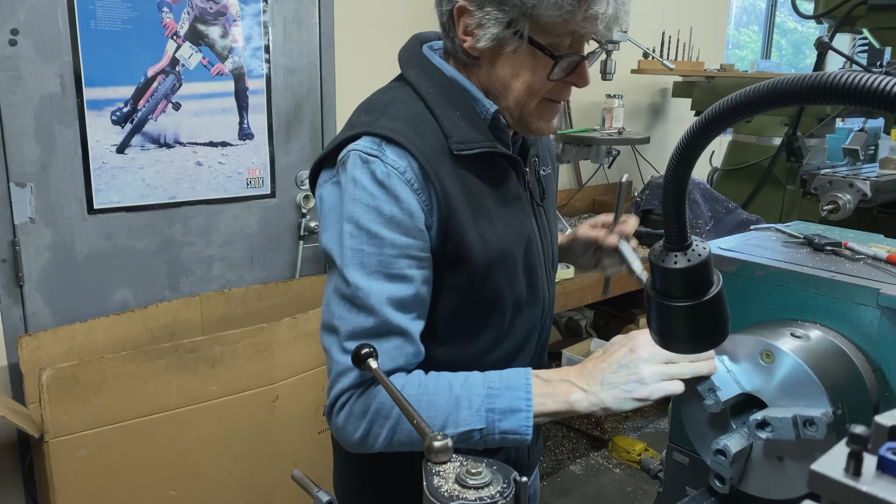That's what happens when you're in the shop. Things sometimes go a little sideways and you don't expect it.

Hi, I'm Paul Brodie. Mitch is behind the cameras. We're back in the shop working on a Giraffe Bike, an 1894 Giraffe Bike.

I have metal, I bought some metal. I had to order it, they don't have this just lying around anymore. This is bronze, 660 bronze, 2 1/4 by 5. It's a little bit longer, but I got something I can grab in the 3-jaw chuck. This little piece of metal has some weight to it. $150 including tax, so it's like, whoa, okay, well, I need it. I don't want to use anything else.

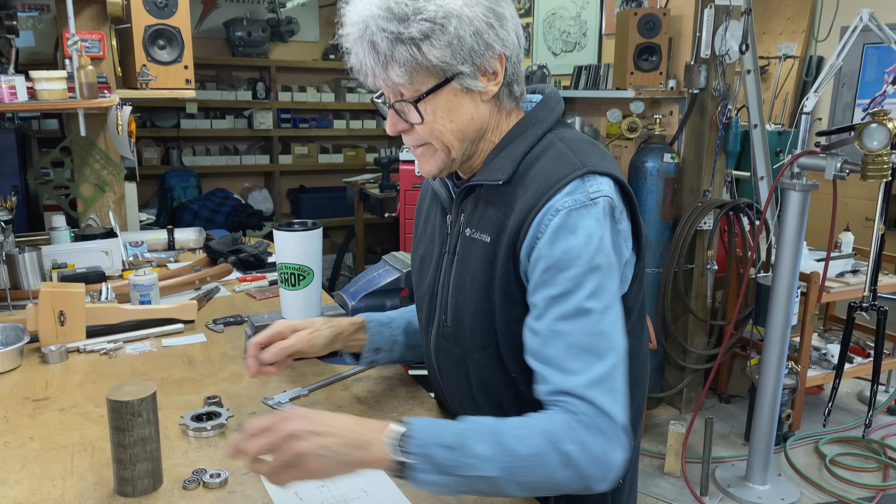I bought some bearings, these little bearings, there's 3 of them. They're made in Japan, these were $60. So the cost is there, that's for sure. I'm not complaining, we have to do this. This is a good project.

I got the freewheel, you saw that, that was another video that's done. And I bought a tool because when I designed the hub, I had to figure out that this tool has to go in like that. There you go, it fits in there. So the hub can only go so far.

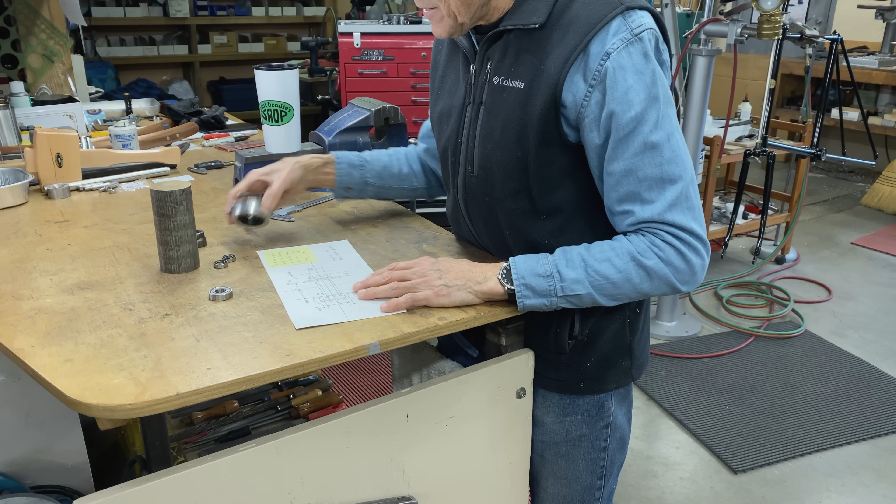Now, another point that's going to happen, when you look at the drawing here, here's the bearings. There's a bearing here on the left side, and because the right side has not a lot of space, since this is kind of small, I had to use 2 bearings. That's where those bearings go.

This here is the thread, that's where the freewheel threads onto, and you can see I made a note here. I was wondering a little while ago if we need a spacer because I can't thread right up to the shoulder. There's always a little gap because the tool has to stop, and the tool has a point, and the shoulder of the tool has to stop before the shoulder of the hub. So I need to make a spacer to go in there so that when I screw on the freewheel, it doesn't lock onto the end of the thread instead of against the shoulder. That's not a good design. So I took that into consideration.

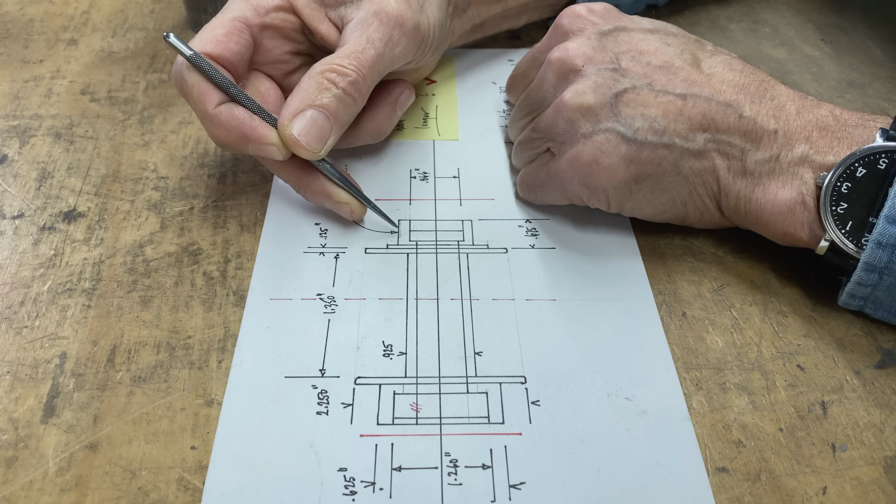Another thing I want to show you is, am I starting on this side here, or do I start on this side here? Because I do have a choice. Well, I'm going to start on this side here because there's a big shoulder. See there? There's a big shoulder. And here, there's going to be a thread. If I hold this in a 3-jaw chuck, even if I have some aluminum spacers in there, it can damage the thread. So I do this end first.

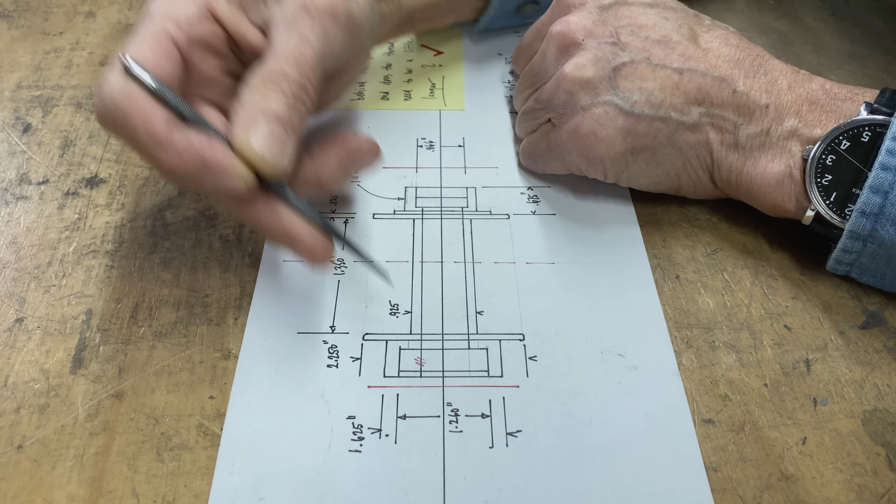I bore it, I drill the hole, I bore out the middle part. And then when I've got all this shape done, basically this is just rough still, that's when I flip it around. I cut off this part because there's going to be a piece here, you can see what's going to happen. I've got about 1 inch extra, I didn't have to order quite this much, but whatever. And that's the frame, that's where the frame goes from here to here. So I'm obviously going to have to make some sort of spacers to go in here to space the hub from the frame.

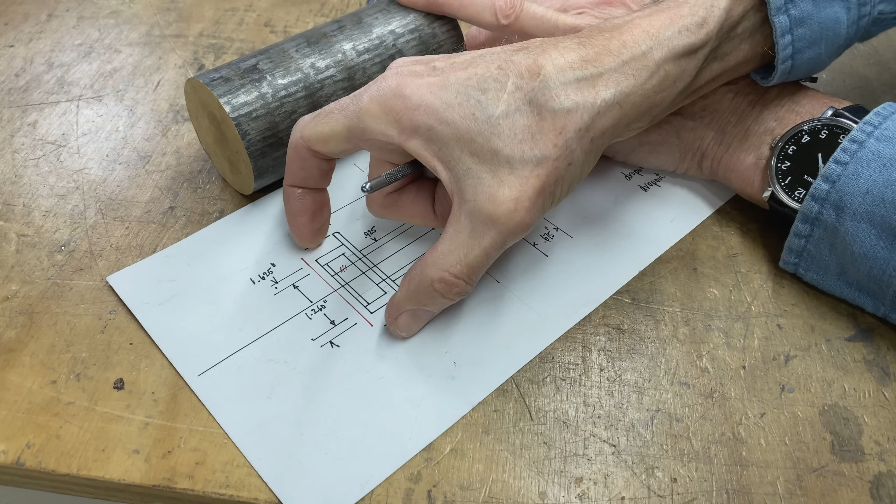I'll cut it off, I'll hold this here in the 3-jaw, I'll dial it up, and then I'll machine the thread and the spacers for the bearings. Let's go to the lathe. I'm excited, thanks for joining us.

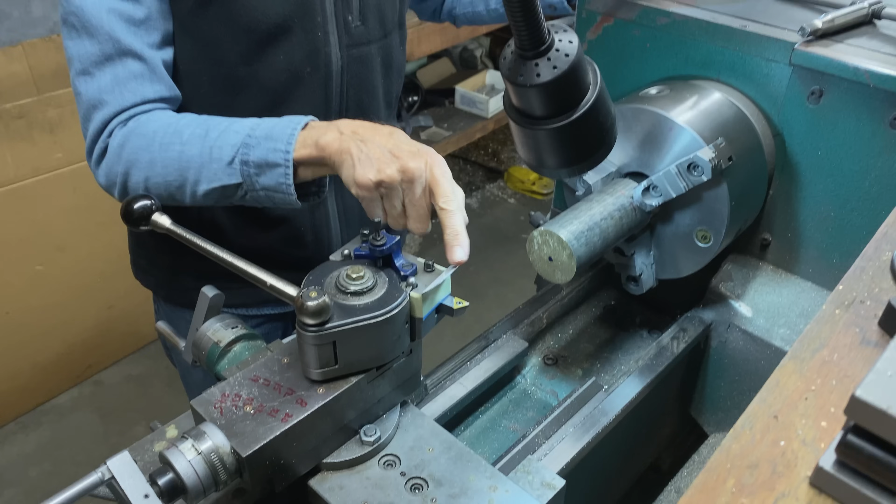I made a little shield here out of aluminum, it's pretty thin, it's 040, as in 40 thou. We're going to see if I can kind of hide behind the shield, because last time I was really getting pelted by all this stuff. I had to wear a full face shield. You couldn't see that in the video, but I got the full face shield because these little chips, they're hot and they're sharp, and they were coming all around my glasses. That part of it wasn't a lot of fun.

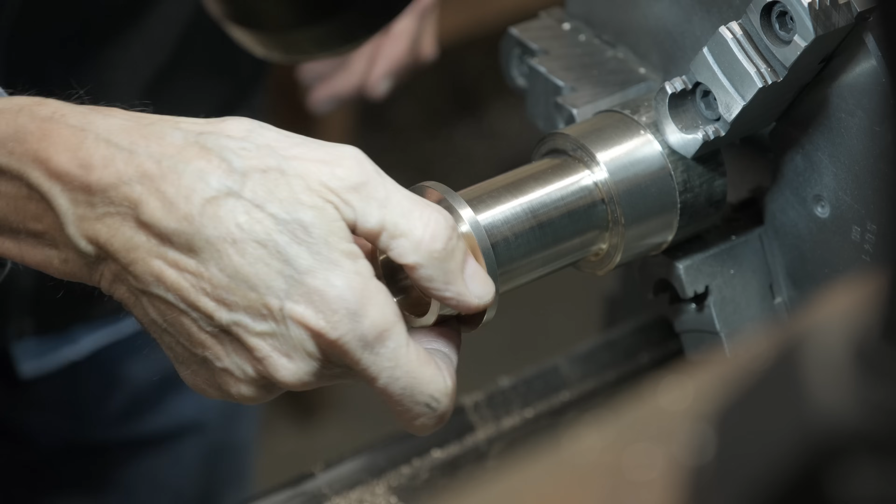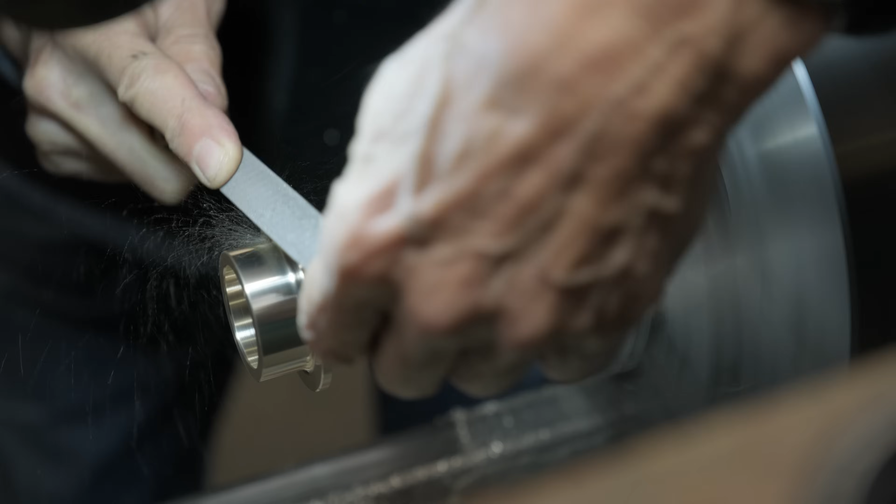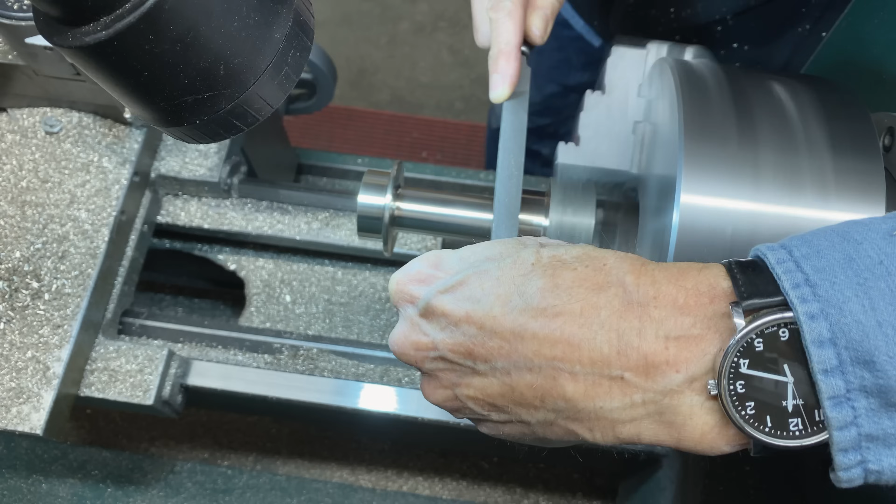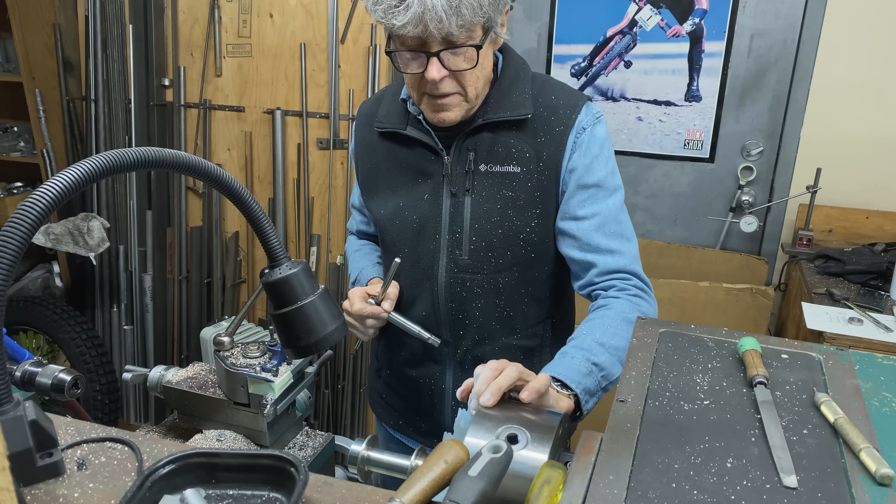Okay, we're going to work on this part now. I think we'll hacksaw it next, use the bandsaw, and then I got to drill the holes for the spokes. It'll be easier right now while I don't have the thread on this end. So I think I'm going to hold it in the rotary table, in the chuck, and next are the spoke holes. That would be good.

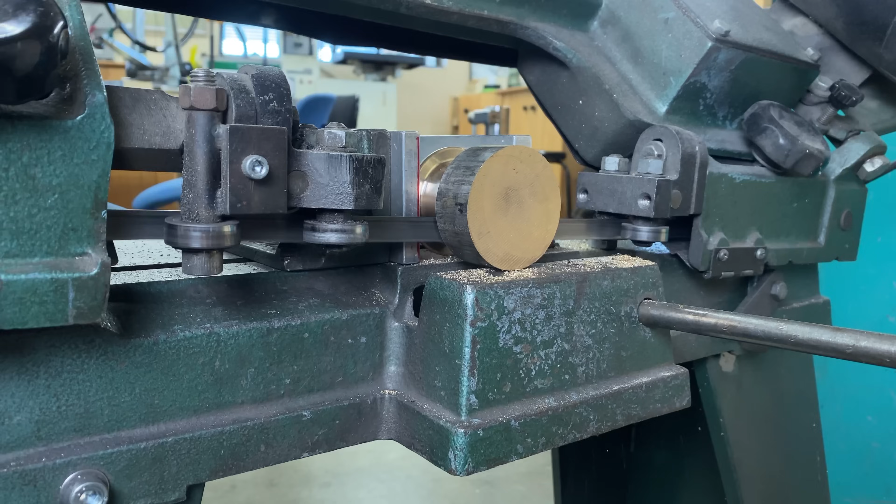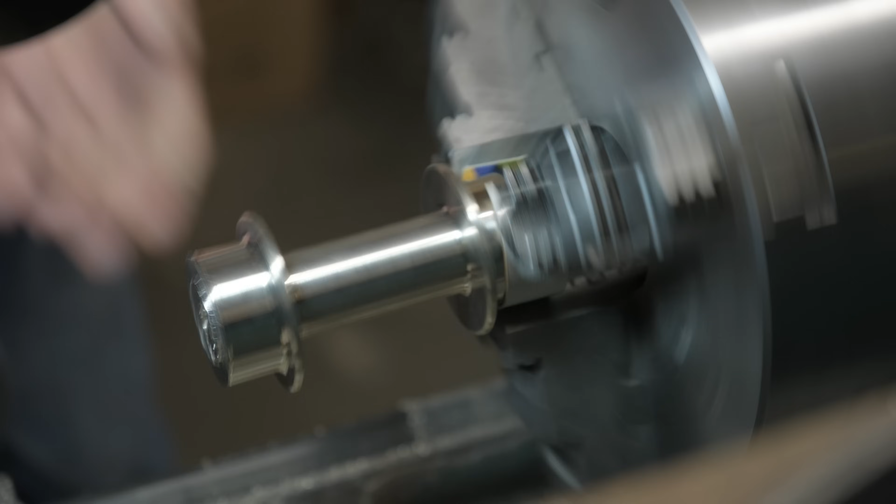Oh! That's not supposed to happen. Oh, it chipped it. I can fix it, I just have to take off a little bit of extra material. Okay, that's my blooper for today. You've seen it now. That's too bad.

I thought I was doing everything right, but I guess it's out so far, and I took a little bigger cut because I thought I could. Well, I can't, not with the cardboard in there, because the cardboard is kind of slippery, right? See here, it's got the paint on the cardboard. Okay, smaller cuts.

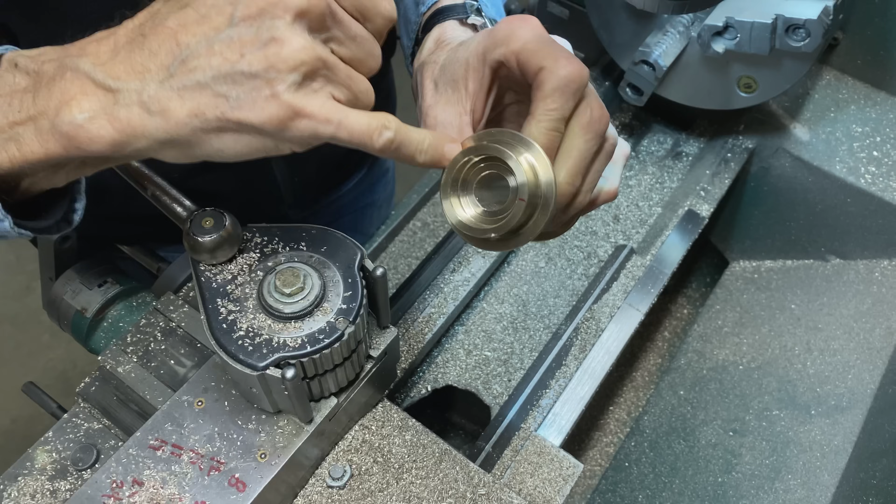See these marks? That was my screw up. I need to fix these marks, so I'll put it back in the chuck and take off the least amount possible just to clean it up. So I don't feel good about that, but that's what happens when you're in the shop. Things sometimes go a little sideways and you don't expect it.

There's one tiny little mark there. I'm just going to leave that because it's so small, most people will never even know it's there. So there we go, I fixed my mistake. Now we're going to go to the mill next, use the rotary table, put spoke holes in, and then after that we're going to put a thread on there, and the hub will be basically done.

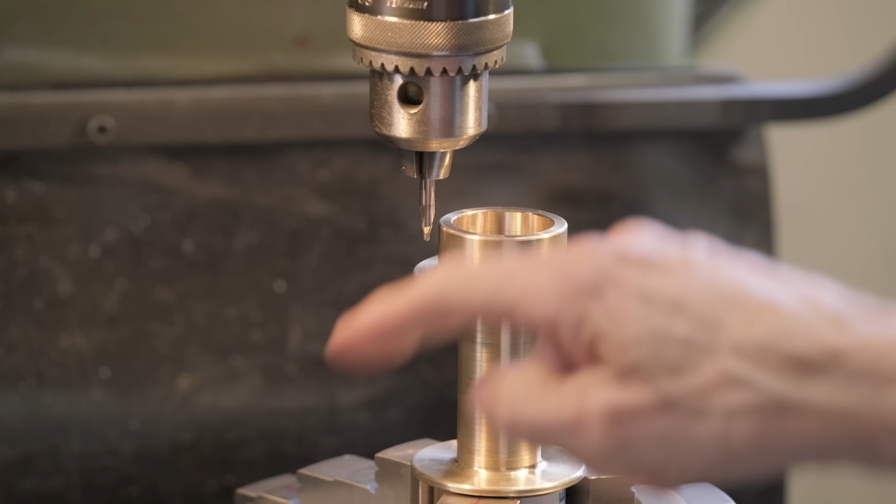I got the rotary table all set up here. I've got a little center drill there, and I've got my notes from the front hub. This tells me how much I have to move to get 16 holes, because it's a 32 hole hub.

That's important. What I'm going to do this time - last time I just used the center drill on the front hub, then took it over to the drill press because I thought it would be easier, since I've got a very small drill, like an 085, a number drill. I'm going to go around again and drill the hole because what happened in the drill press is that it grabbed and wanted to pull the hub up. It was kind of hard to control because it's bronze, and it's not always easy for machining - it wants to grab sometimes if you're not set up properly. So I'm going to use the center drill and then we'll go around once again with the smaller drill.

Spoke hole size. Okay, 22.5 degrees. Here we go.

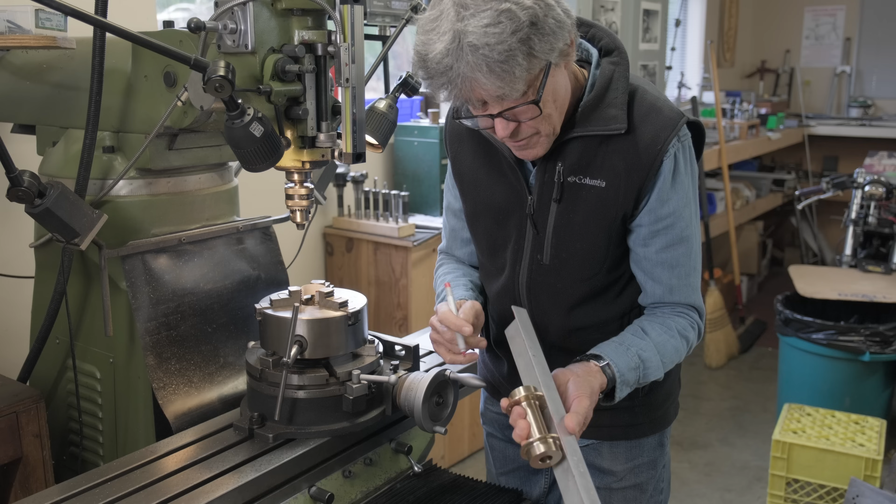So what I'm going to do here, I'm going to mark right in the middle in between the holes with my red Sharpie, and then use the extrusion because that'll line up perfectly. Can you see how that works? Then I put it right there. So I'm halfway in between the holes because the holes have to be offset - if they're not offset, that's a problem. It's hard to lace the wheel when the hub's incorrect.

So one more go around here with the holes, and then we'll go into the drill press. We'll deburr - we got a special drill. Is that pretty close? Well, might be a couple thou out, but not bad. So, 790.

Oh, oh. Might have to use silver solder - I went too far. Okay, oh well. I should set a stop, I should set the stop. So what I should have done here, see here, that's the stop. I need to put that up to there, and then I can't do that again.

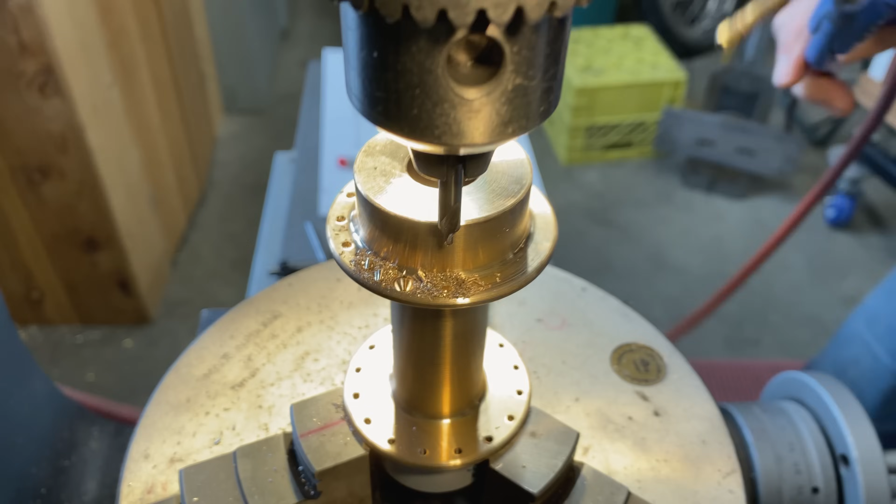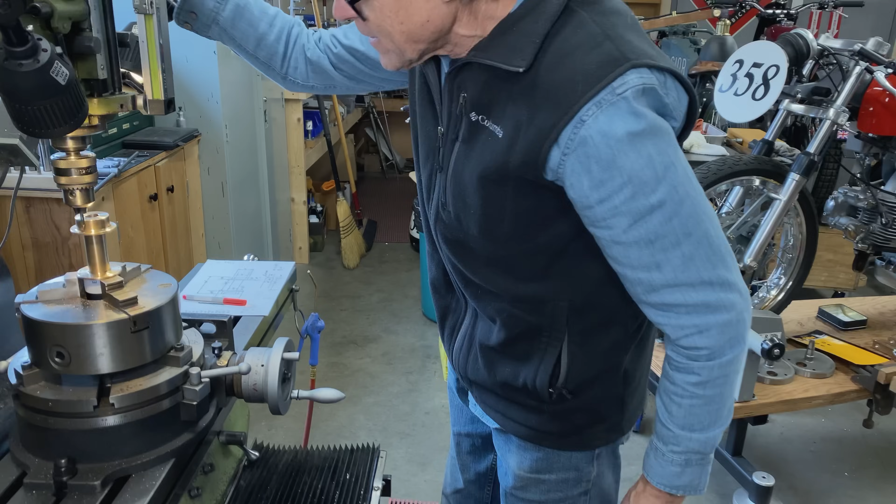I'm talking about other ways to make mistakes. Oh boy, see there? The center drill went too far. So that needs to be filled in with silver solder now and re-drilled. So that I can't screw up anymore now because I've set the stop.

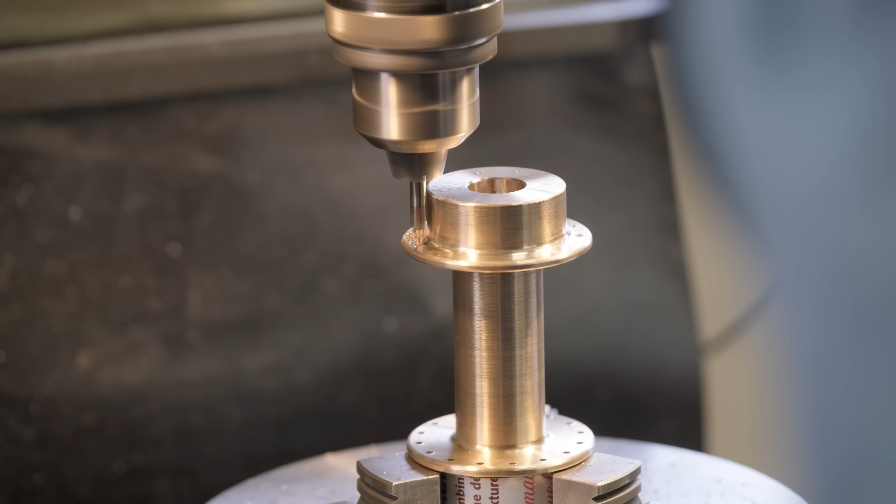When you silver solder, always use some emery cloth and sand the oxide off. It really helps it to flow. That's a good tip.

I did not think we were going to be using the torch today. This was a machining day exclusively, and now because of what I did, we have to get the torch out. Never done that before. That's a brand new mistake. So it just shows that you don't know, you know.

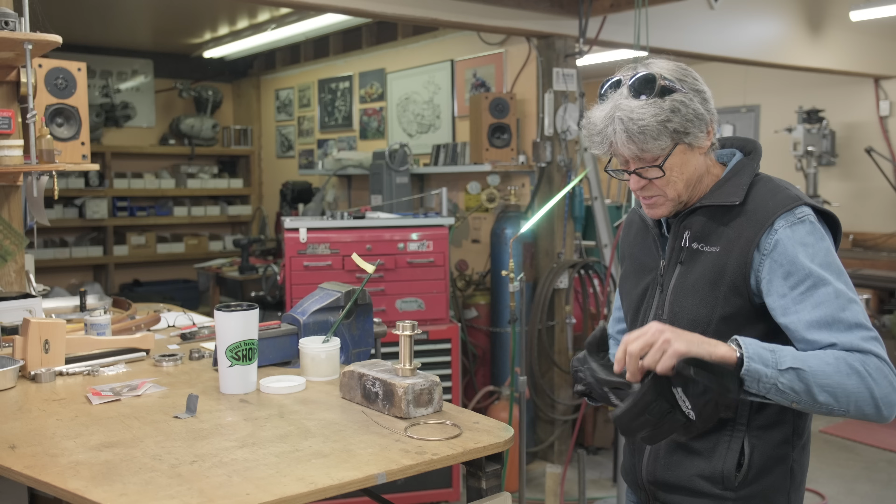Actually, what happened was Mitch and I were talking. I got distracted. It's not his fault, but I needed focus and I lost my focus. And it happens really quick, like an extra second pulling down, you go too far. It breaks through on the bronze, and then it goes fast. And then it's a big oops.

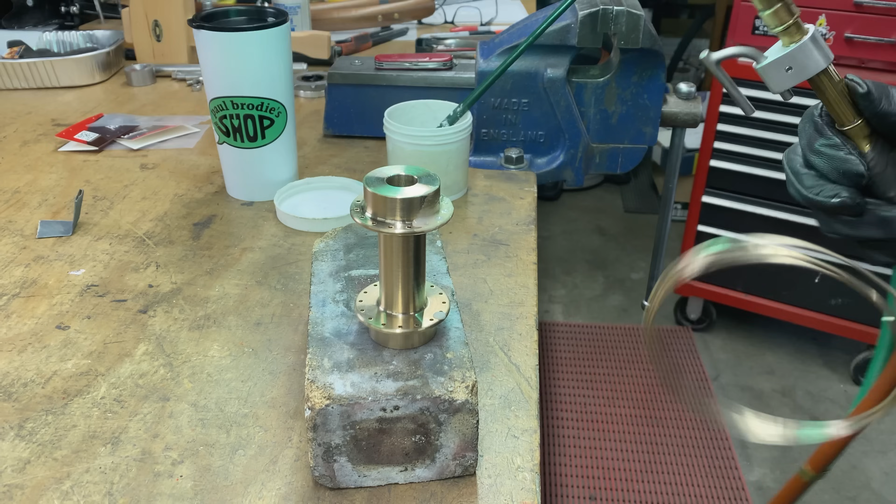So, okay, I got my flux here. A lot of yapping, I know, but hopefully I can salvage this. So I got to get it up to heat, but not too much. Maybe I'll put the flame down just a little bit. This is a huge heat sink, so even though I'm heating up the flange, not quite sure if I got the flame hot enough, but we're going to find out.

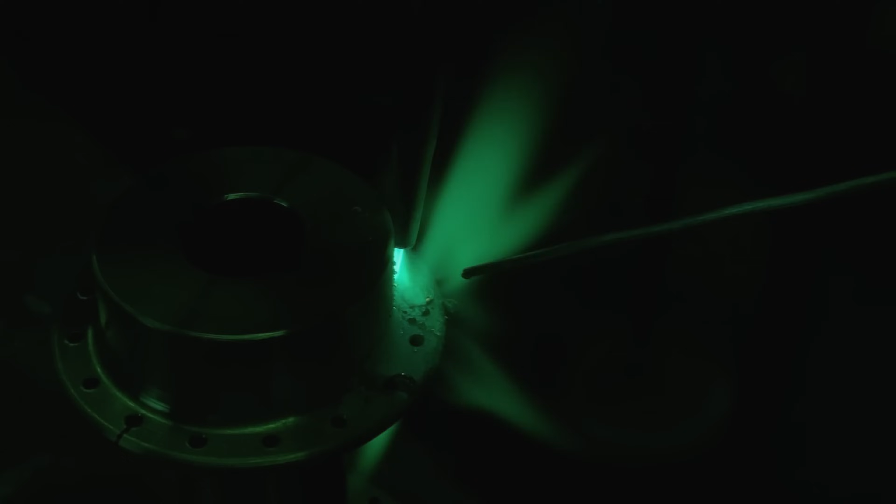Sometimes if you put the cone right down inside, that's a trick I learned from brazing.

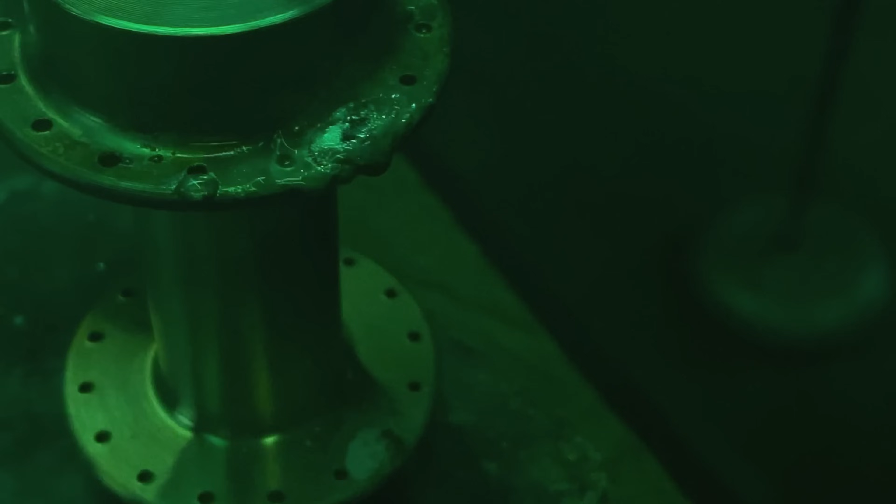There we go. Okay. You see that? It flowed. Whew. What a nail biter.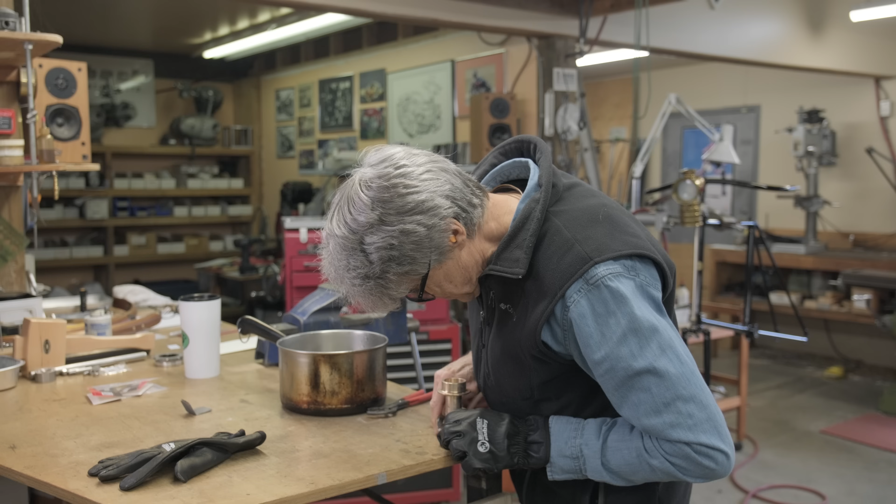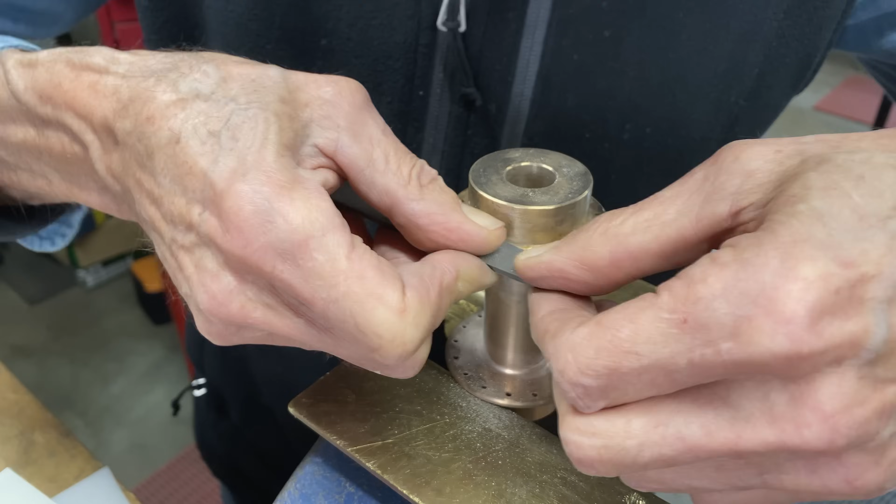This is camouflaging again. I did camouflaging on the lathe. This hub is certainly not going smoothly for this guy. And once the spokes go on, you don't look at the flanges of the hub much at all, unless there's a really big problem.

I might put it in the lathe and just skim that really carefully. Let's go do that. Let's go put it in the lathe, and then we'll go back in the mill.

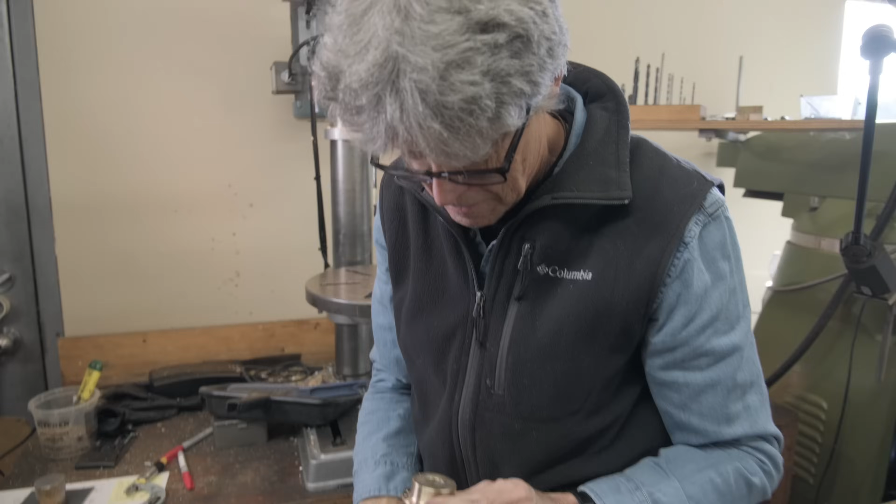I'm looking for the hole where we fixed. Oh, there it is, right there. You can see that? If you look really closely, you can see the silver. There's a little ring of silver solder there, but aside from that, very hard to tell. So, well, a lot of fixing going on. I hope things get better today. We can always hope.

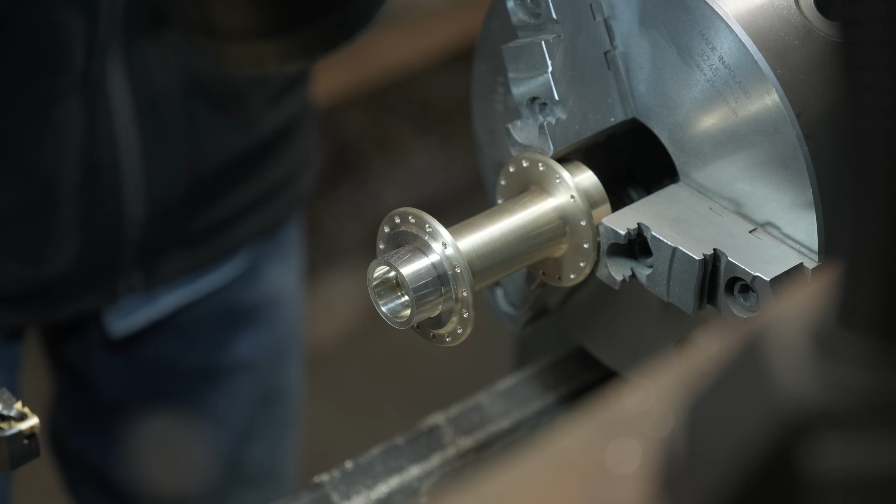What we're going to do now is to check the thread. So I'm going to put some felt pen on there. I'm going to set up the indicator so I can only go so far. And we need a little bit of lady luck here.

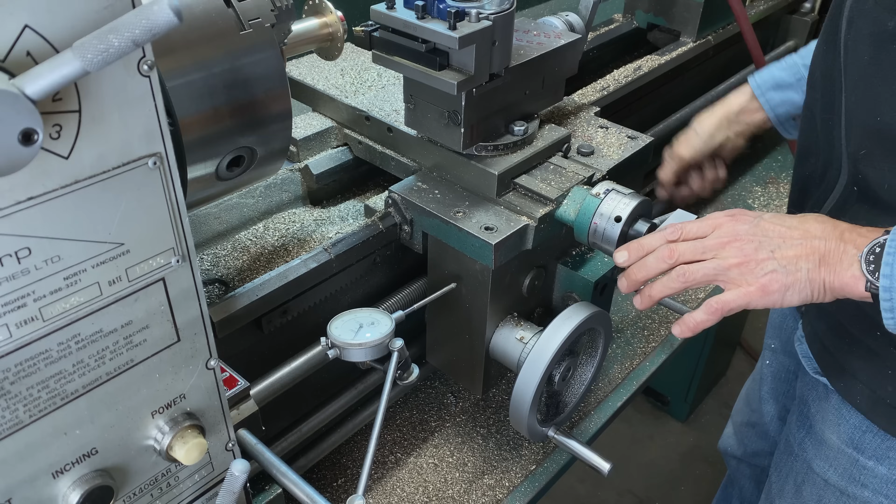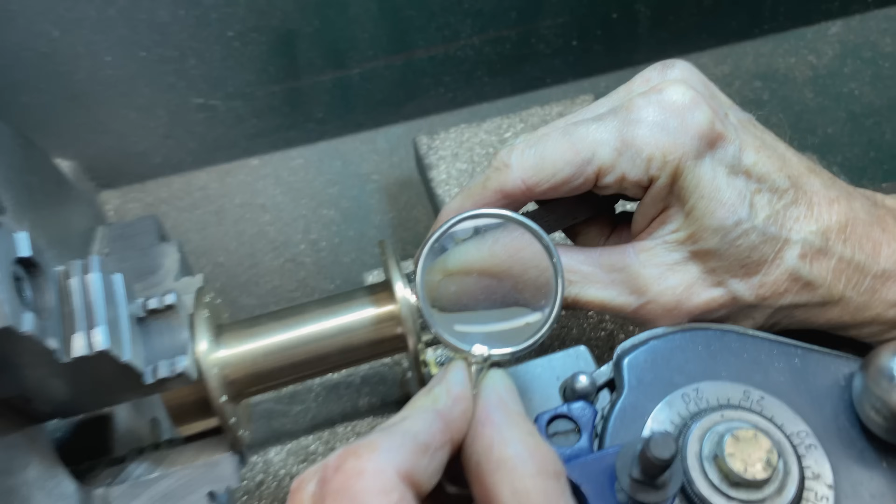So I want to go in up close, but not that close, because I am going to put a spacer in there in between the hub and the freewheel. So we'll put the indicator back on. Yeah, that's good. Can you see down there? Can you focus in? I'm satisfied with that. So we're going to make a thread now. Here we go.

What? How did that happen?

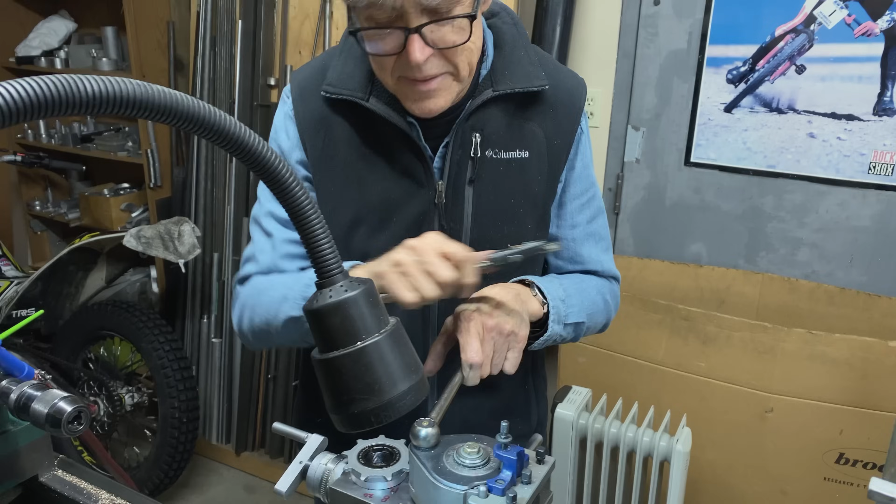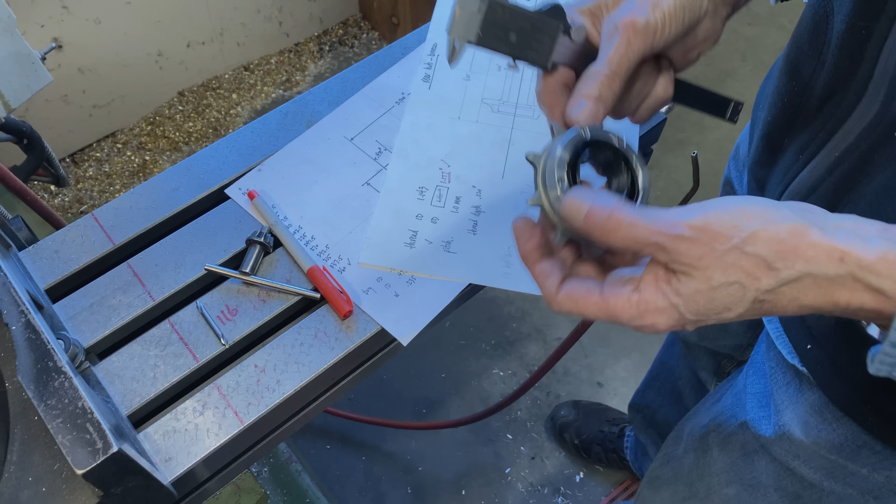Okay, I made a hub on the whippet, and I made an assumption that I got the same kind of a freewheel in dimensions because the pitch is the same, and it said 1.117. Oh, 1.177. Okay, so that's what happened.

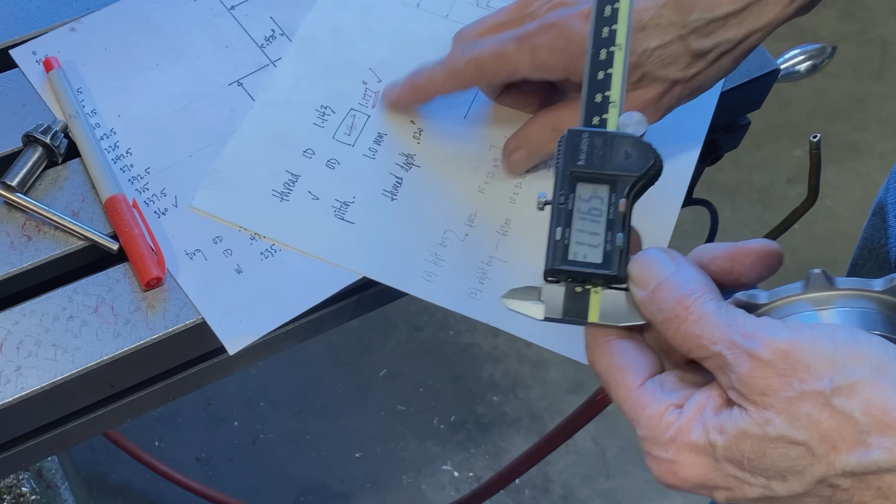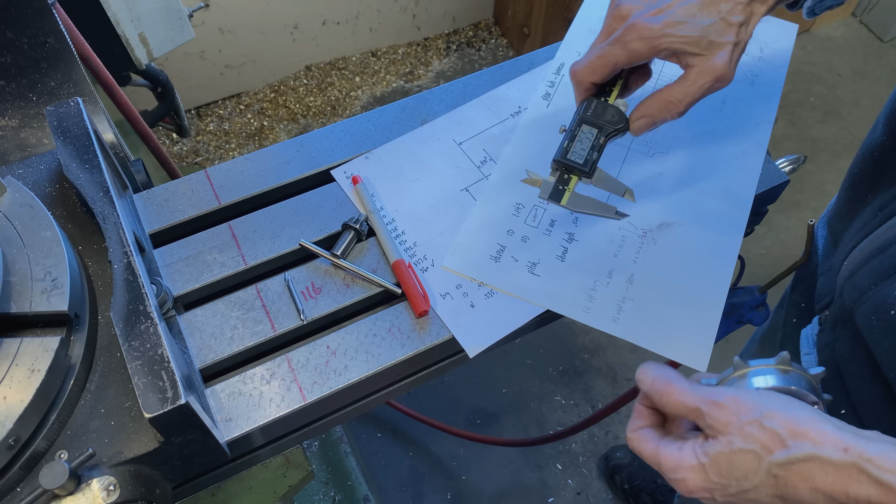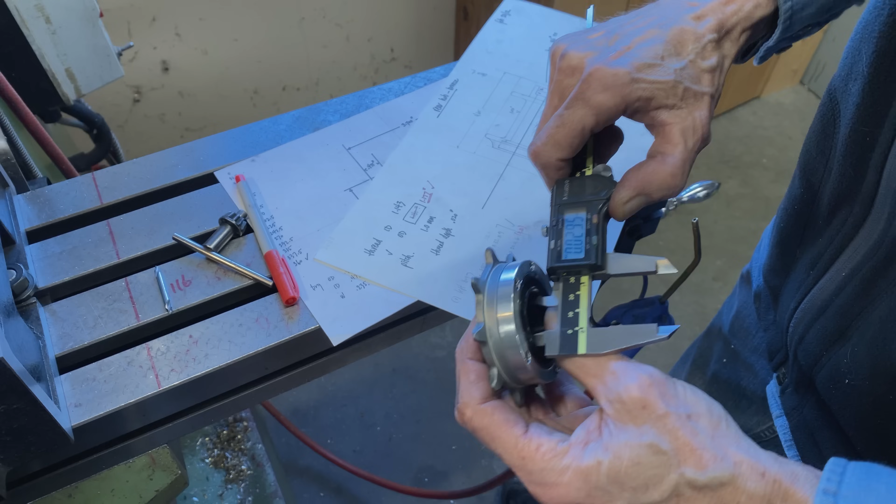When I set my vernier, I set it for 1.117, and I should have set it for 1.177. So my vernier was off, and then when I checked this, because I know that on the thread depth, it's 20 thou, so I'm looking for a difference between what the bore is and what the thread is. And it came up at 30, but this is larger. So it should have been smaller, and I didn't catch it.

I thought I needed to have a minus sign there, and I didn't get the minus sign. So what I have to do now is to make up a sleeve and Loctite it on there and then recut the thread. I have to thread internally.

Well, this hub has been a bit of a disaster, although I do know how to fix it. It's just a pain in the butt.